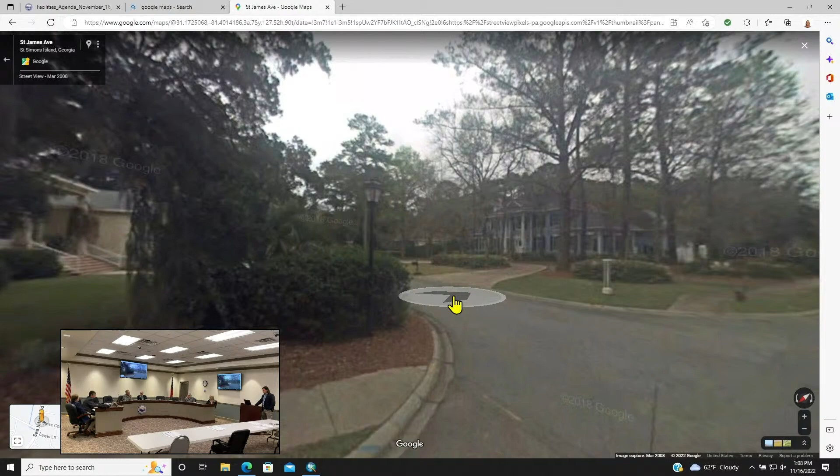Well, let me restate that and be sure we understand. It's caused by a lack of compaction at the time of construction. The completed pipe's fine, the pipe's in good shape, but the dirt around it has moved. Okay, so what we had is poor performance on the part of the contractor 6 years ago.

I think if you had one up earlier, it was a pretty good little snapshot of what had occurred.

Is there any striping required on this repave? The road's not currently striped. I didn't think it was, but I just wanted to check.

I have another question. It says here, does not include testing, permits, fees, and unsuitable soils. So those are costs that we have to bear in addition to this? Those are costs we'd have to bear. We do compaction testing in-house, our inspectors do that already, so we provide those services for our projects. And then for unsuitable soils, we do have a certain stockpile of available materials if we need to provide that as well.

Any permitting fees from the county on that? It's just a right-of-way permit. I believe, is there any charge for right-of-way permits? Not for us, not for us as a public utility.

And the last question is, how does the notification work for the people affected by the construction? Do we notify them, or does the contractor? We will notify them that the contract has been awarded. The HOA out there has been very concerned about this issue being corrected, so I'm sure when we give them the go-ahead, they will let everyone know about the situation.

Okay, I believe they're watching live. Yes. Okay, I understand that. And it has been a struggle to get quotes to pave this, right, so we've unfortunately had to put them off for several months. So now they see live their government in action.

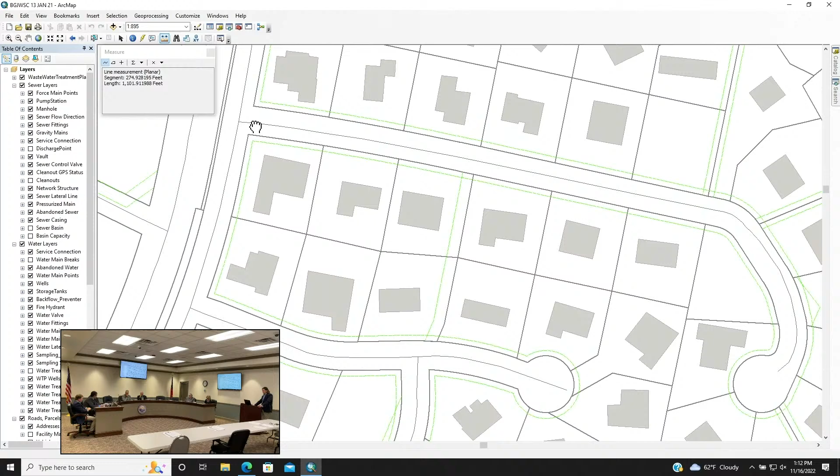I think we may want to have some understanding with our two local governments about what's practical in terms of a warranty that the utility provides to them on something like this.

When you have, over a period of time, I'm sure they've had some heavy equipment in and out of there, performing other maintenance or other construction. And those are things that we cannot control, but the county can in this particular neighborhood.

Certainly agree with that point, and it's been an ongoing discussion we've had with the city and the county, between both leadership and staff members, of exactly how long are we liable for these situations if they're 10 years old. And we get requested, honestly, to repair paving issues that were from road cuts made by United Water before the creation of joint water and sewer.

I think that deserves some work. And I wouldn't ask a question, I would say this is our warranty period.

That's all I have, Chairman. It is a tremendous cost to us to fix these old repairs. How much is a settlement?

Couple inches. Couple inches, yeah. It's enough, in certain areas, yeah. It's enough to alligator crack it. It's definitely settled.

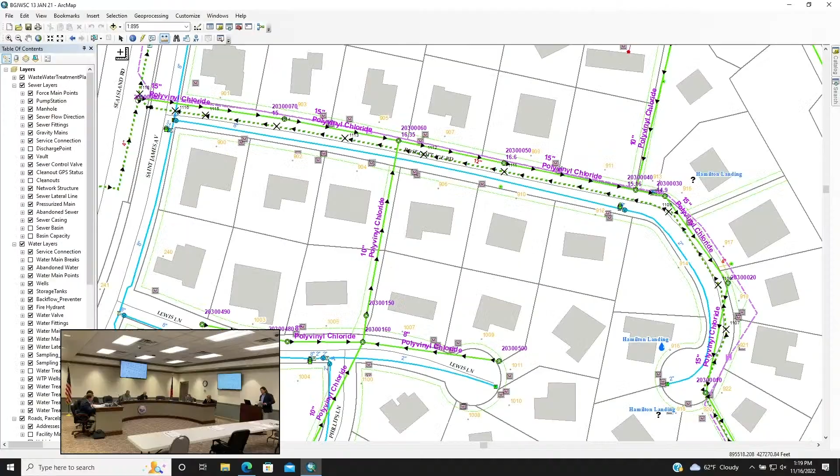Perry Place report. Okay, this item is an easement dedication and infrastructure dedication combined, as a result of private development for a residential development called Perry Place.

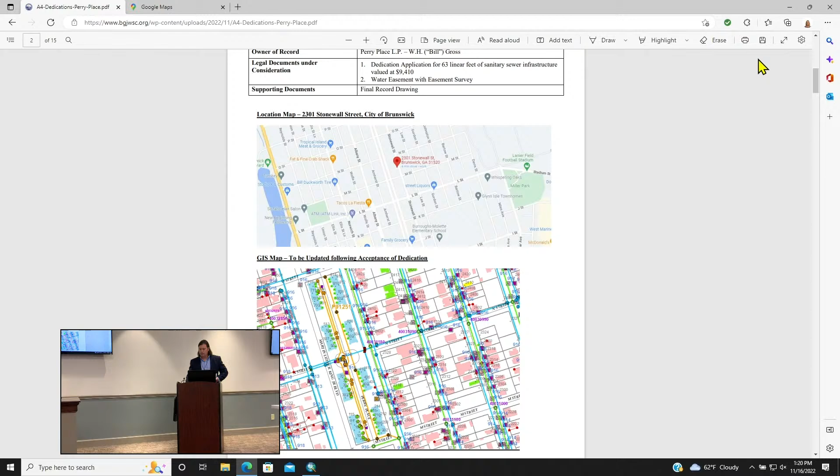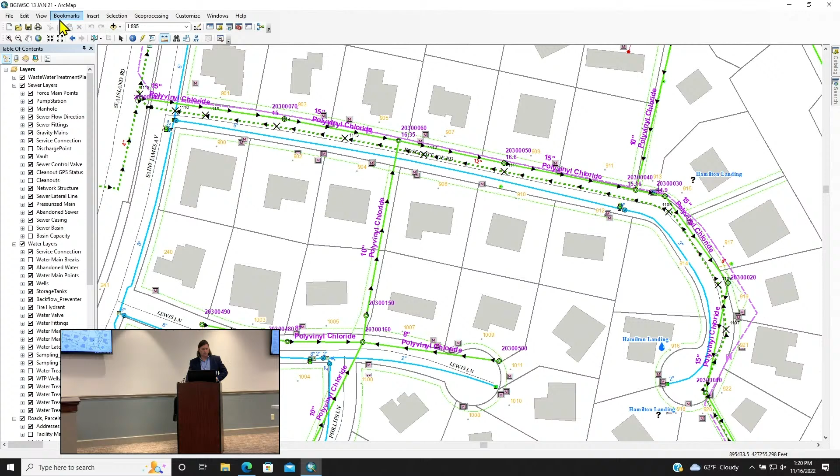And location of this, here. I will zoom into a spot to show you why we're obtaining an easement. It's off of Martin Luther King Boulevard and Stonewall. It's the site of the former, I think it was a bus yard there at one time, that some of the folks who've been around for a while may remember.

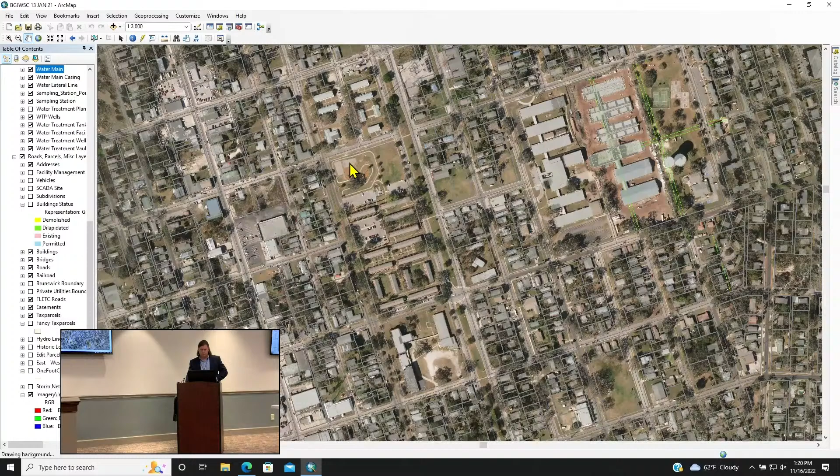It canceled, you've got to refresh. Yeah, it did. You made it mad. You know you don't click it more than once. Moving way too fast. All right, let's see. Well, now. You got to go south. I had my spot saved in here, then I took it off. Start over.

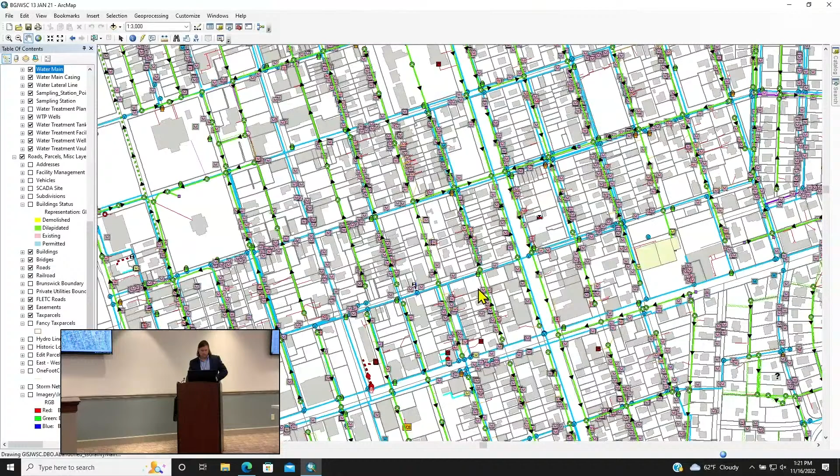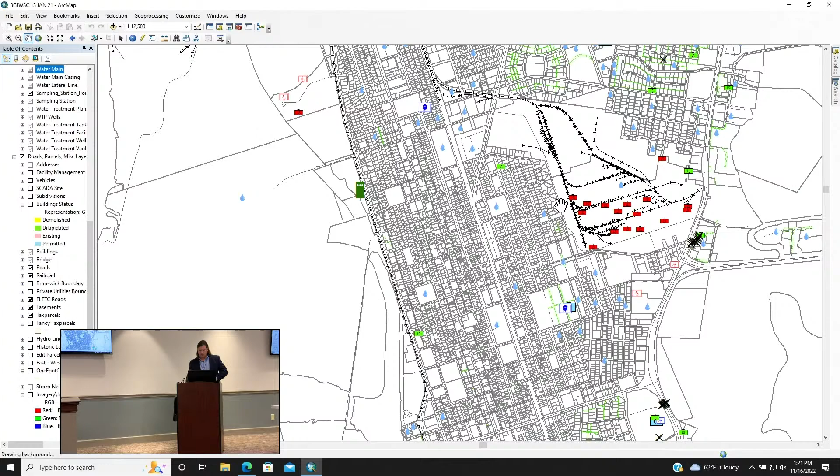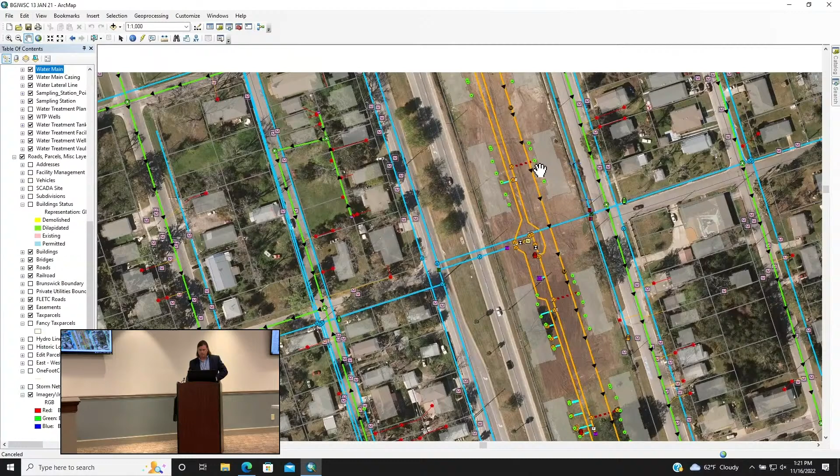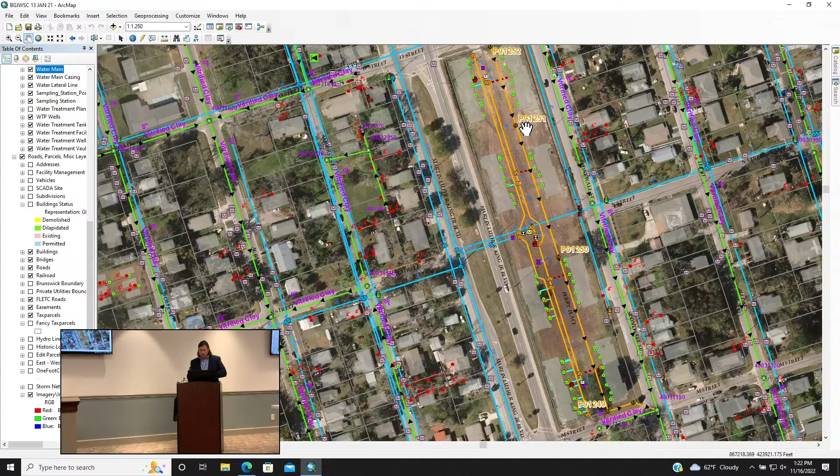It's the yellow, there we go. There it is, bear with me here. Kind of looks like in the old ortho image, at least it still looks like the bus yard was cleared. The ghost images are the new residential buildings that are in there. And the yellow lines are what's considered proposed, but if this passes and everything is accepted, those will turn into private or red infrastructure, still considered in construction phase.

The one portion I want to draw your attention to here, there's a pre-existing water line that runs through the center of the project, and it was probably when M Street maybe actually went straight through there. But here's an existing water line, that's what they actually tied into to serve their project. So as they develop this, we're obtaining an easement that's going to allow us future access to own or to maintain that line. And then there's also one little piece of sewer line associated with this as well.

The record drawings that are part of the exhibit attachments show that little guy also. Very last sheet, at least on mine, it's the very last sheet. Yeah, you can see a little 50 or so foot piece of sewer line in there. So that's the sum total.

The water line is not part of the dedication. Joint Water and Sewer Commission already owned that water line. It's part of the city's infrastructure. So the water line, we don't have an easement for that. This is to obtain an easement over the pre-existing water line that we already owned.

And then the sewer line is not in, but they're putting that in on this project? Yes, sir, they have already put that in and installed it, and the sewer line is down on this corner. Yeah, it's on the last sheet too. Yes, sir, very last sheet. The green, that's it right here. Now, we're talking about only accepting the sewer line and the existing water line?

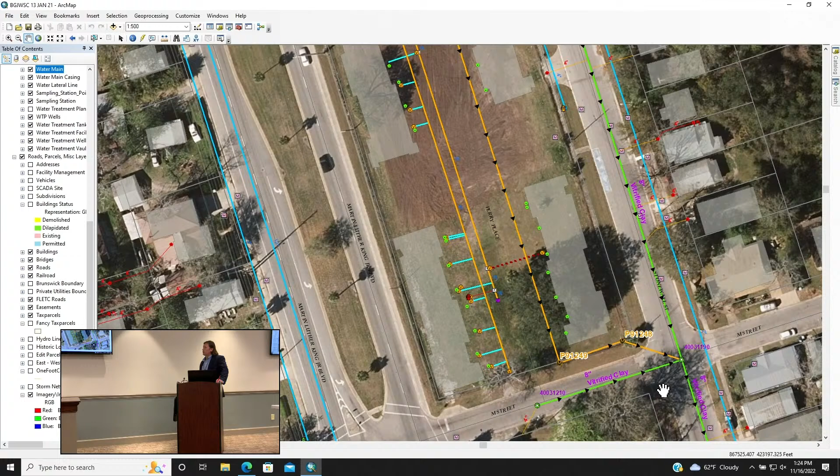The sewer line and then an easement over the existing water line. We already own the existing water line. Correct. Right, but we're not accepting any of the water and sewer within the private development. Everything, these are master metered. This is a master metered project, and so all the water lines internal are going to remain privately owned and operated. And the only piece of sewer that they are dedicating to us is in the public right of way, this piece here, to connect to our infrastructure.

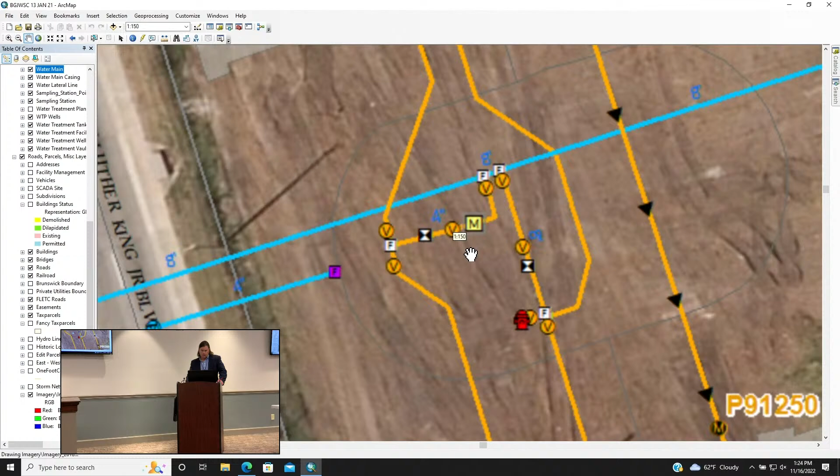And where's the master meter going to be? On that water line? That water line that crosses the property, that's the easement. It looks like we got several connections to that water line. I see a master meter, but I see several connections. Let's see.

Yeah, I may have to grab my glasses. Can you pull up the drawing we're looking at? Let me do that.

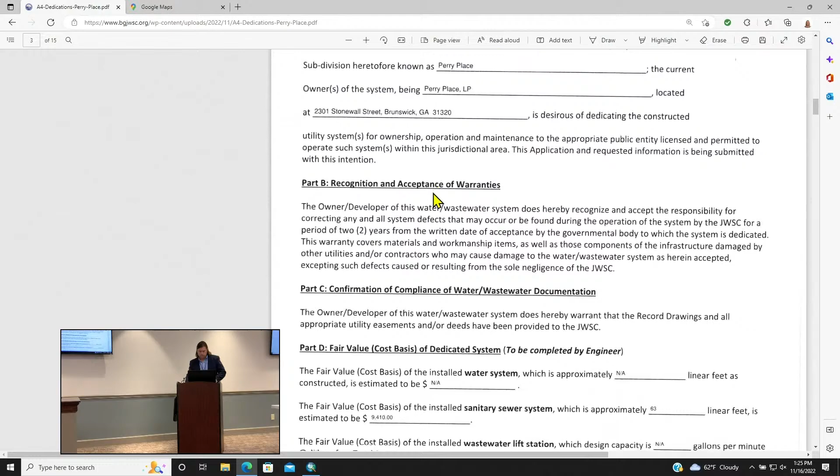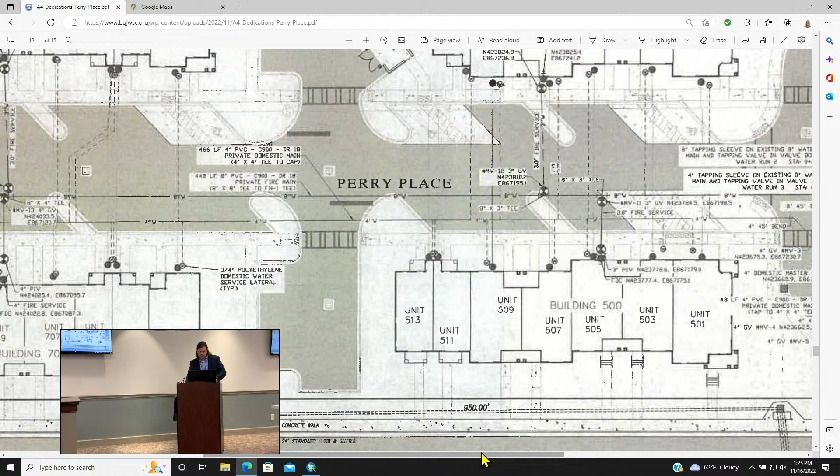So we presently don't have an easement over the water line, that's correct. Was this a bus yard before? Yeah, for the school system. Right, so we didn't really need the easement there particularly, they just moved the buses out of the way. Well, as Todd suggested, M Street probably went straight through at one time, until the property was closed, and then there's just an oversight to pass an easement along.

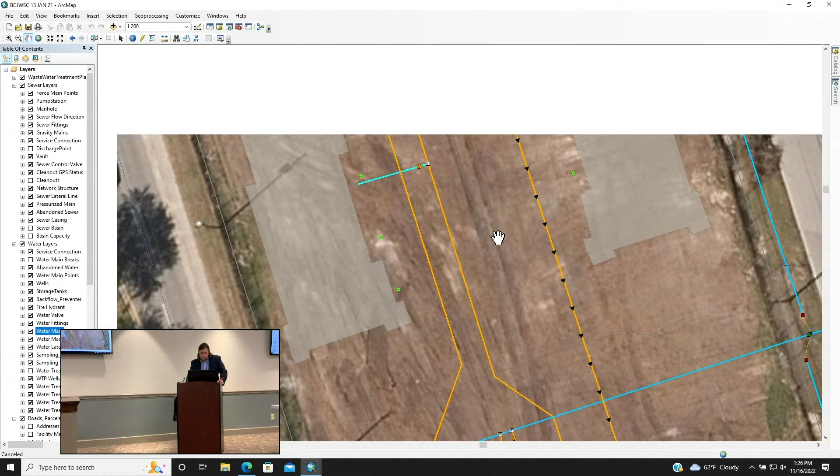Oh okay, it looks better than it did. Is the construction completed on this project? It is, I think it's fully occupied at the moment too. Are those rentals or homeowners? That I don't know, I don't know exactly.

Looks like there's one 4-inch meter coming off right there by the easement, and then there's a 2-inch irrigation meter over there with a 2-inch RPZ on it, for irrigation.

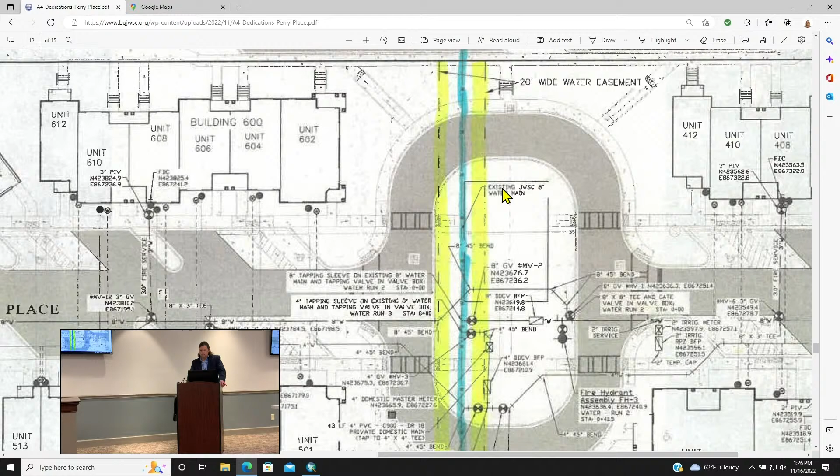Intent to remain private from the beginning, from the developer's perspective, correct? It was, yes. They own the fire hydrants and everything. As far as the fire department, is it gated? No, sir, it's not gated. I know the outside perimeter is gated, I don't know if it's gated to get in. I think it's gated - I know the perimeter, there's a fence along the street. Okay.

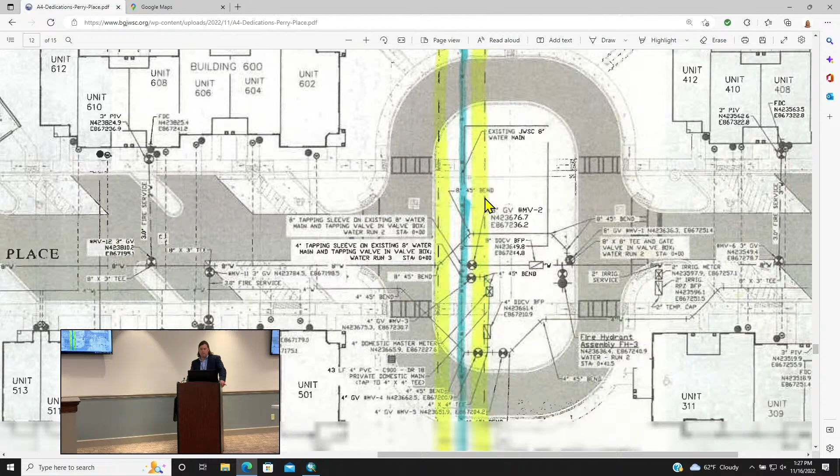So we just have one master meter? One master meter, yes sir. Well, and an irrigation meter. So we have two connections? And a fire line, so technically a third connection, but fire lines are handled separately, they pay a flat rate for that. So we got a third meter for fire line? There's no meter on the fire line. So we have three connections to the water line? Yeah, that's what I can't see.

It's what we call a double detector check. If there's a low flow, it's picked up. It's basically got a small meter off to the side, like a bypass, so if somebody ties in, it's got an irrigation detector check on the water line, fire line. On the fire line, correct, yes sir. And we've got an irrigation line that has an irrigation meter, and we've got a master meter on the water, so we'll be sending them two bills, irrigation and - I believe so, yes, two bills, same envelope. Possibly a third if there ever shows up a low flow on the detector.

Can I have a motion? I'll make the motion, I'll move the Facilities Committee forward this project with associated dedication, application, and easement to the full commission for approval and acceptance. I'll second the motion. Motion second, any questions? Hearing none, all in favor? Motion carries 3-0.

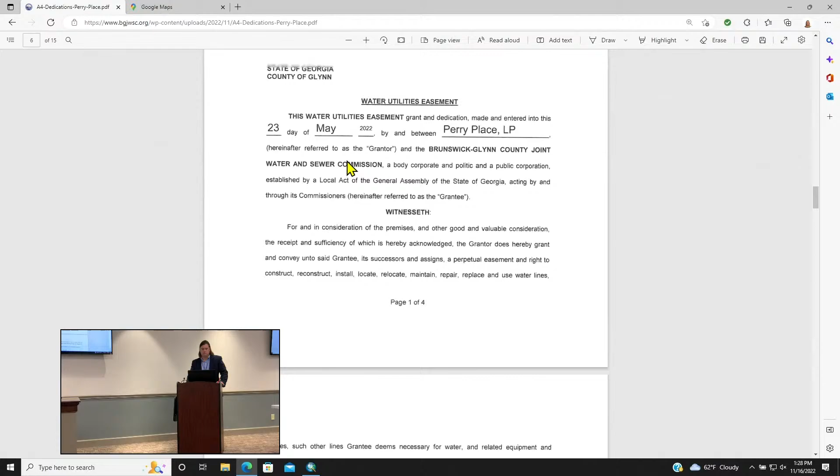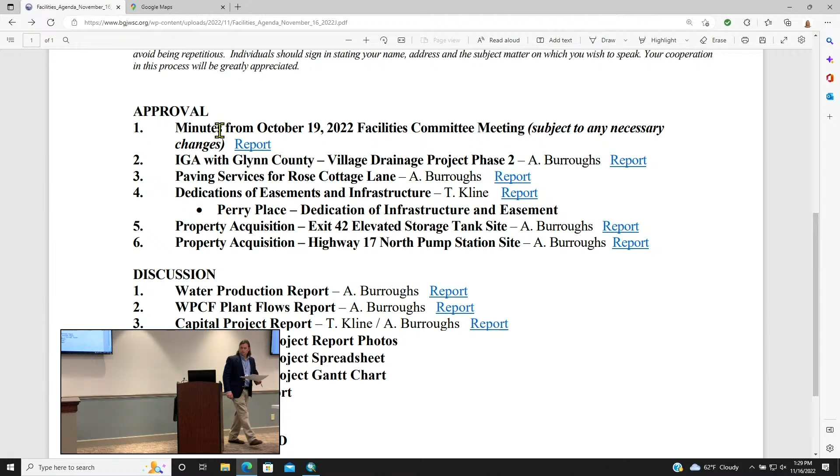Thank you. Next item is property acquisition, exit 42 elevated storage tank. Mr. Burroughs? Yes sir, out at exit 42 there are two large development tracts. The well-known one is Trade Winds, but also the Economic Development Authority in Glynn County owns the Gateway tract. What we are requesting is an agreement with the EDA for us to purchase a 150 feet by 150 feet approximate parcel in order to construct an elevated storage tank adjacent to the existing water main that crosses the Gateway property. As part of this agreement, there will be no exchange of funds.

The agreement the Development Authority has agreed to is they will be able to paint their logo on the tank, or at least some logo they want, at the time it's constructed. So they were okay with the ability to have their logo up there in exchange for the parcel. The goal here would be to build a 750,000 gallon elevated storage tank. That project is funded through the bond issuance, and this will be adjacent to the interstate right-of-way, coming into town past the bridge at exit 42, or the overpass at exit 42.

We don't have any other elevated storage tanks in the area? The closest elevated storage tank in the area is the one at the end of Kate Road, it's only a 300,000 gallon tank. And given that area's impending development, and also the chance for industrial development in that area, we feel it's important to put a larger tank up there for better control of pressure and fire flows.

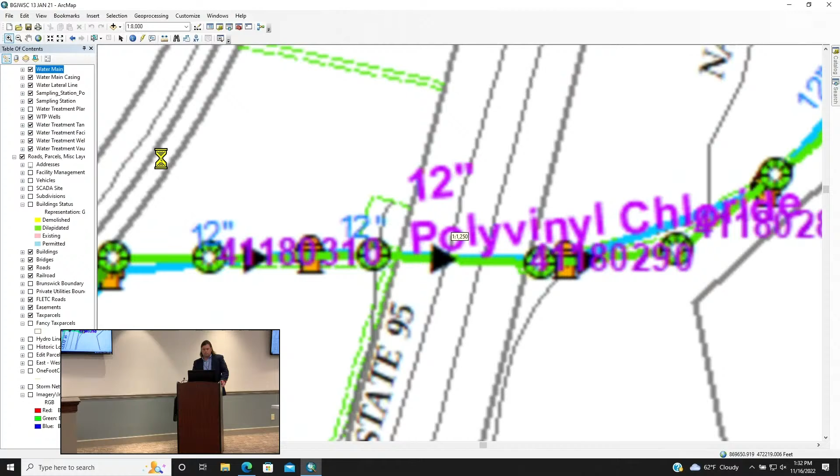Egress. Have we done any soil borings on this site yet? We have not. We've got the boundary survey, and then we're getting a topo survey completed, and then we'll move into engineering at that point, hopefully in-house engineering on this one.

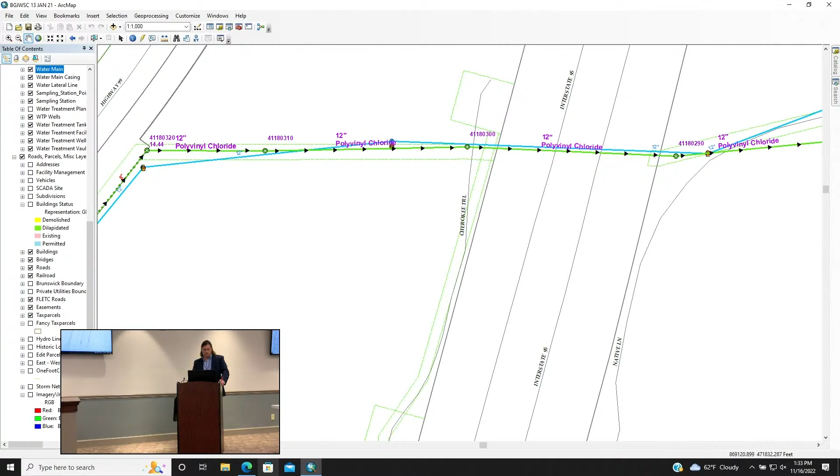So you can kind of see it there. We'll be just to the south side of the water line, because to the north side of the water line is where that billboard easement was at. So you can see it from the interstate, yeah.

What size is the water line and sewer line going through there? A 12-inch water line and a 24-inch sewer line, I believe.

The Canal Road well, we take off the Miocene wells up there, so once the Canal Road well is built, obviously we'll have to orchestrate which wells pump to which tank, and that'll help balance our system out better on well usage as well. I would suggest we get soil borings as soon as possible on it. Yes, sir.

Any other questions? No. Hearing none, all in favor? Motion carries 3-0.

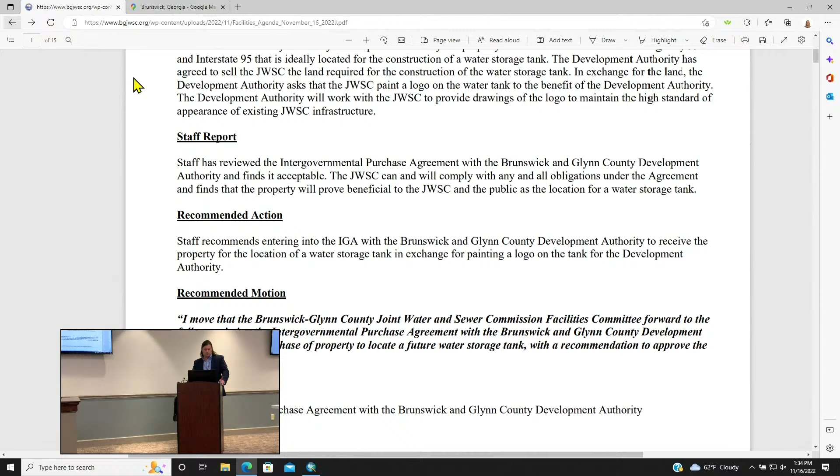Next item is the property acquisition, Highway 17 North Pump Station Site. Mr. Burroughs: Yes sir, there's an existing mobile home park out on Highway 17 called Golden Shores. Currently there's a need for us to install a larger pump station to serve more property in that area. Currently, the only thing served by a private pump station is the Golden Shores subdivision. There's another subdivision just to the south, and the ability to potentially long-term serve customers on the east side of Highway 17. So we've been working with the property owner to acquire our standard 50-foot by 50-foot parcel to install a new pump station at the location, and to get them off their existing pump station. If you recall, we installed a new force main in this area a year and a half ago, to get the force main out of the GDOT right-of-way for the 17 widening project.

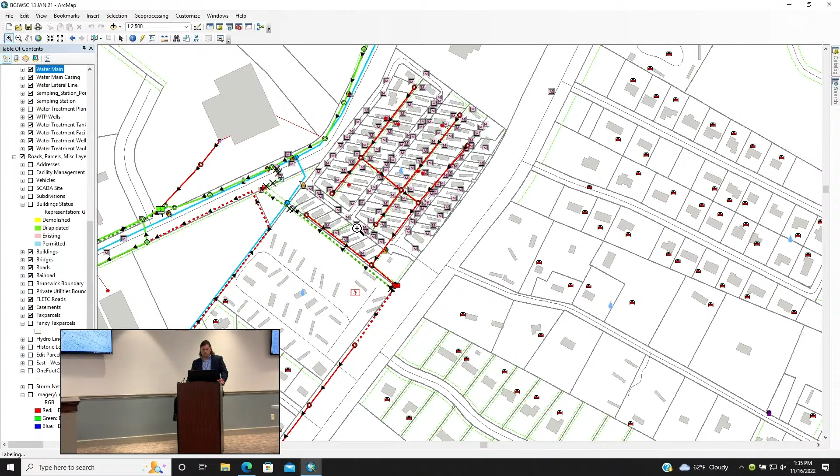I will note that the existing infrastructure on site is not up to code, but with the addition of a new station on the exchange parcel, the system will be deemed acceptable to the Joint Water and Sewer Commission. So the property owner has agreed to give us the property in exchange for us taking over his system as a result. Can I have a motion?

I'll make a motion that the Facilities Committee of the Brunswick-Glynn Joint Water and Sewer Commission forward to the full commission with recommendation for approval the purchase of the pump station parcel, in exchange for taking over possession and maintenance of the water and sewer infrastructure of Golden Shores. Second. Motion second. Are there any questions?

What kind of time frame are we talking about putting a pump station in there? Design plans are ready, we just gotta send them, once the parcel is straightened out, to EPD for review, and then we're putting them out for bid.

And we don't take over their existing structure until we have ours in place and running? We will take over their existing structure when the parcel is dedicated to us, when the paperwork's signed. So if anything goes wrong between the two times... we already know what's there, we are very aware of the condition of that current station.

And so to follow on with the timing of the operation of the new pump station, we're talking about at least by the end of first quarter next year. Yes, well potentially, possible if we put it out. EPD reviews taking usually 4 weeks or so to get anything back from them right now, maybe a little longer on some projects, so put it out for bid first quarter next year.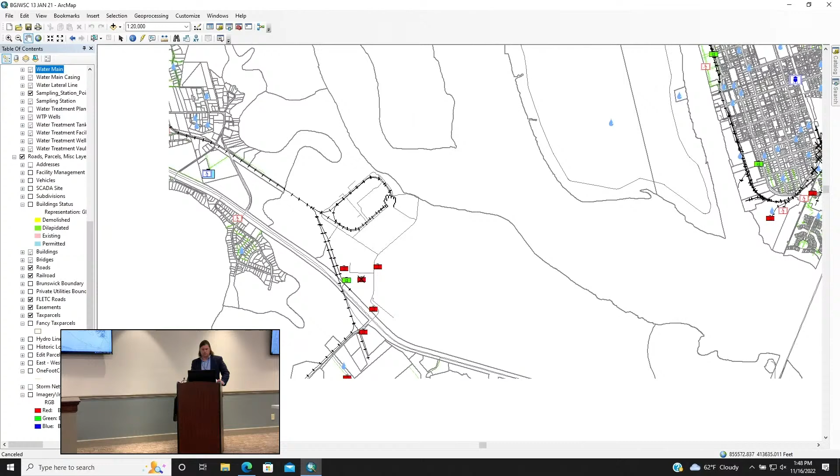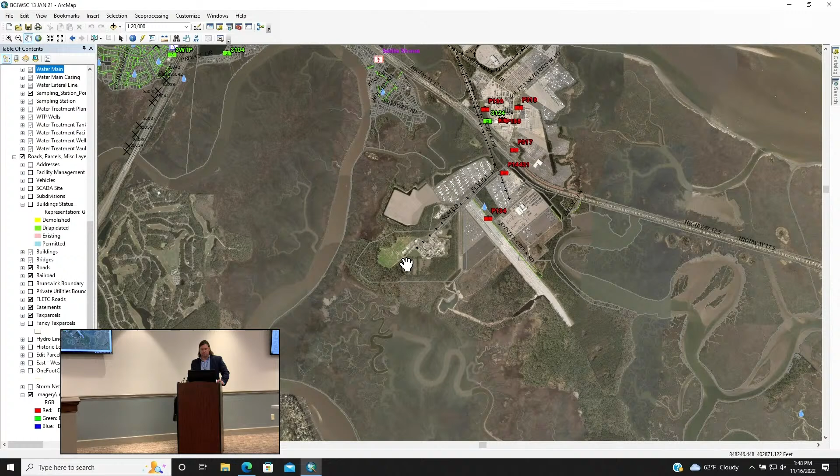So there, you see the port there. You can turn the aerials on. We can extend it to them if they want. We've brought that up, we have actually mentioned that. They have a nice water tower down there that they own. There's the port, the Cimarise facility is back in the back there, and our water system stops at Royal Oaks, at Fancy Bluff Creek. Zoom in.

This is our Fancy Bluff well here. So where the well site is right there at Royal Oaks, across the street, that's where the water system ends. And they produce their own water. They do, they have their own wells, their own elevated storage facility and everything on site. We take their sewer, we've asked if they'd like to be water customers, and so far we have not been successful. And the sewer is pumped back to Southport?

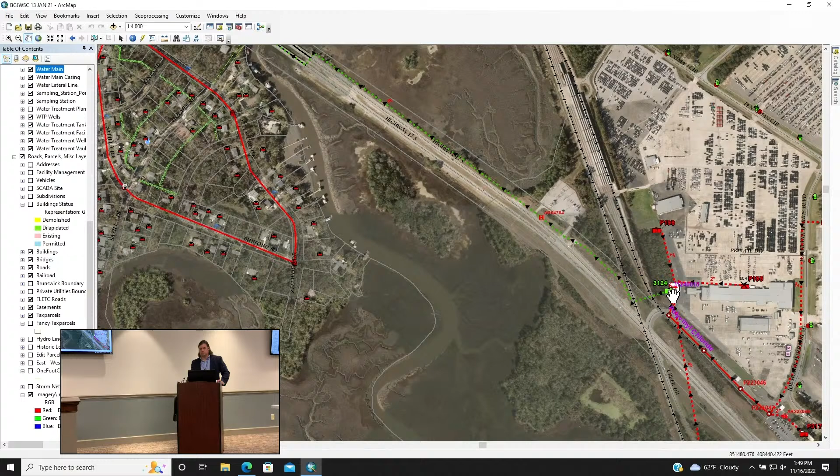Sewer's pumped to Southport, that's correct. Green dash line is the pump station leaving there. They have a sewer flow meter on that pump station that's billed to the Ports Authority. Is that their pump station? No, we own it, maintain it. What might make them change their mind, besides an exposure on national TV? Failing wells would probably be the only thing that's gonna change their mind.

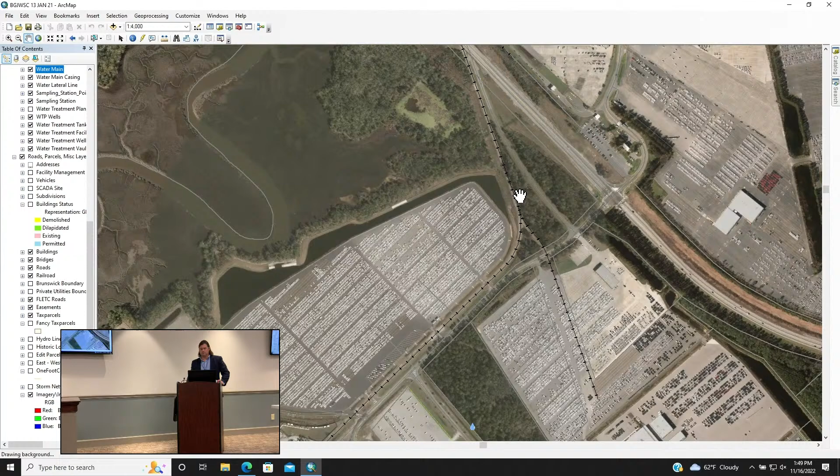And Cimarise is a separate entity. It is, from the Ports Authority, the very southern end of what Georgia Ports Authority has. So they're a self-contained unit, they have their own water system, totally isolated. The only thing they take commercial is power. So they have their own water system too? Yeah, so a lot of chatter, obviously, when major things like that happen in town. I don't know if they take natural gas, but anyway, they don't take any water or sewer. So, just kind of shows you the limits of some of our systems down there, and other reasons we're trying to expand the system. Now that plant was built, shucks, I think it was in the 70s.

That Fancy Bluff well was probably, when was that put in?

2004, well, somewhere around there. Yeah, is that the water system down there?

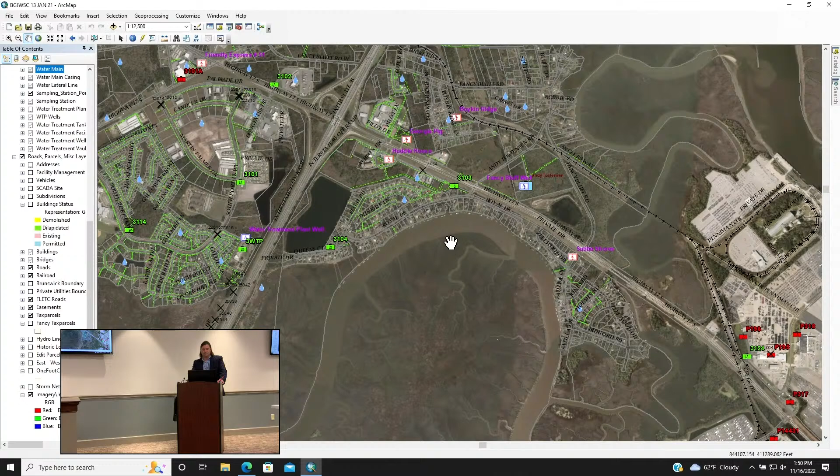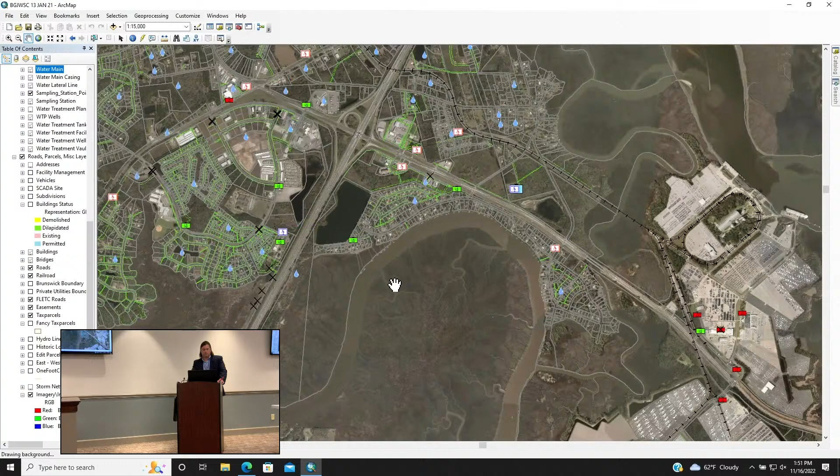We have an issue, not really an issue, just a paperwork thing with EPD. You have to do lead and copper sampling once every 3 years. You're required to have a certain number of properties sampled, but the house has to be built before 1988 and connected to the system. We don't have enough houses built before 1988 at exit 29 connected to our system to get all the samples we're supposed to get. I think there's only 3 built before 88 that are connected. We're supposed to have 10. So we have to tell them every year that we'll give them the 3 we've got, but we can't give them 10 samples. We give 100% of what we have.

Yes, so we certainly would be willing to provide water to them, absolutely, if requested.

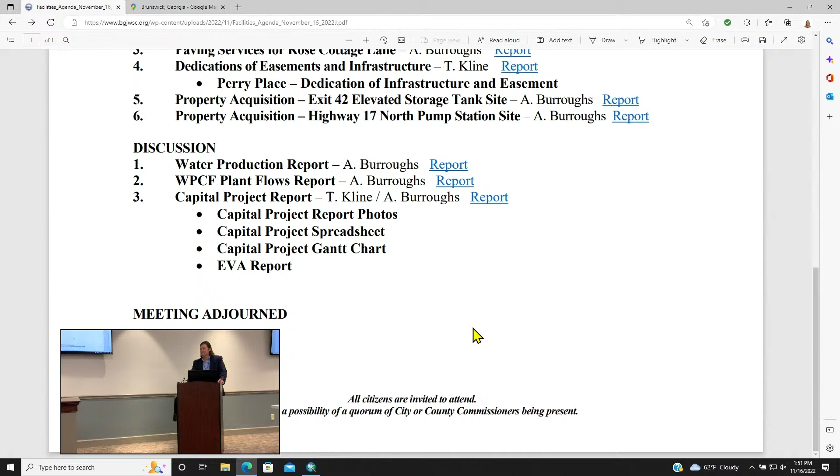Capital project report, Mr. Burroughs. All right, capital project report - our first project, which is good because it's starting with a higher number, meaning they're newer projects. Academy Creek facility there.

We've had some ongoing issues with the filters, and we were finally able to determine the cause. There was a slight piping error that wasn't allowing it to evacuate solids as efficiently as it should have, so they were building up in the tank. It increased the vacuum it was having to pull to try to remove the solids and ended up causing some damage. The supplier and contractor are covering all of the issues and taking care of it.

One of the sides is ready and back up to run, and the other one is being worked on as we speak. Hopefully those will be back up and running before the end of the month, operating the way they were intended to. One of those things - the supplier came down and told me he had bad news, and when he told me what it was, my response was, well, at least we have an answer. Answers are good news, so we moved through that pretty effectively.

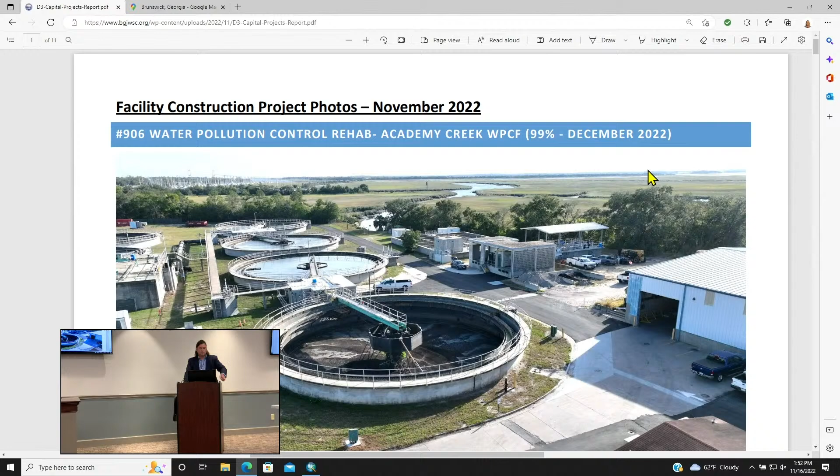So we're on the closed or idled clarifier there. What are we looking at to remove the grit from that part? We'll just fill it back up, and once it's filled and operating again, it pushes all that towards the center and is removed.

The bottom photo there is a shot of the headworks area, a new splitter box we have. You see the odor control tower - startup was officially today, so our operators were trained this morning on the new odor control equipment. It has been very effective, running with all the panels installed for approximately 2 or 3 weeks now. That doesn't mean you'll never drive by and catch an odor periodically, but it's been drastically reduced in my trips through there for the past 3 weeks.

That smaller structure beside the large tower - if you can show that carbon filter right there - will be filled with activated carbon to remove anything passing through the biofilter as well. So that one's moving along well.

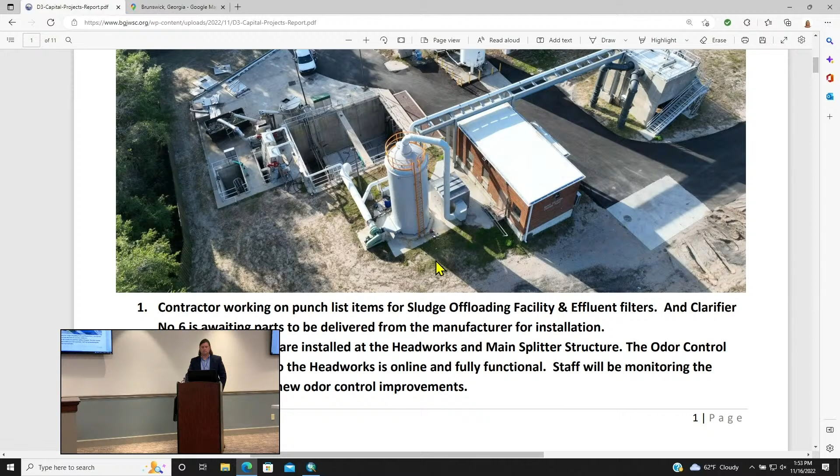Still got some punch list items we're trying to knock out. The overwhelming majority are related to electronics issues. We're having a lot of issues with sensors and HMIs and things like that came standard with the equipment, and we're having to replace them, but the lead times on some of those items has been pretty lengthy.

I have a question here: it says staff will be monitoring the effectiveness of the new odor control improvements. Is that a formalized process?

It's a formalized process where I walked around and talked to people I know who come down 341 every morning and go home on the way to work, and asked them - particularly those not as desensitized to it as some of us who have spent considerable time at a wastewater plant.

In fact, Miss Janice gives me the daily report of whether she smelled anything. Well, at least we have an A-team member here doing it for us. That's great.

Just a thought, perhaps this is in the program - to do some monitoring at the same locations we did, I think it was 2 or 3 years ago, so we have additional data. We have a baseline, and now we have new data since we've operationalized the odor control system. I think that would be beneficial to share.

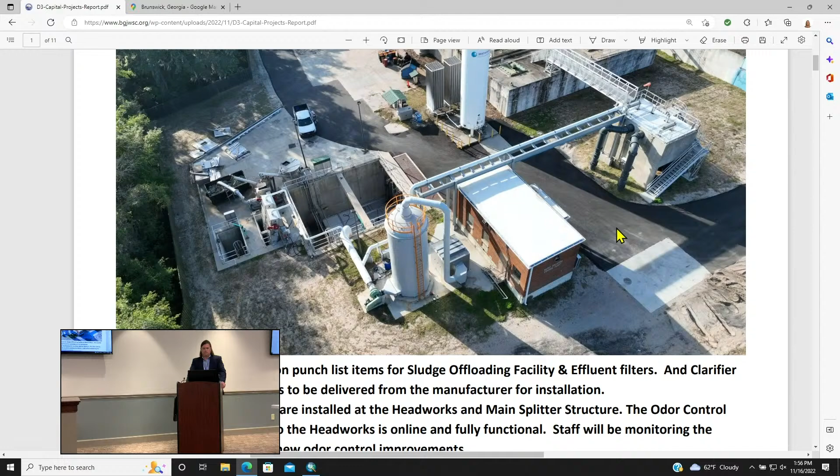These two photographs also show the new paving that we just had done. It looks nice. I have not gotten any more nails in my tires since we paved that. Did have to buy new tires finally, but picked up a few flats from driving around there for the last year and a half.

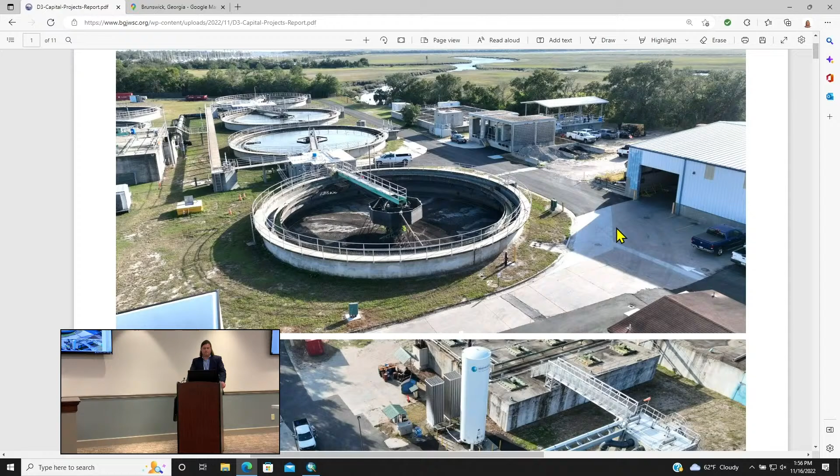So we're down pretty much to the punch item list - punch list items on all that. For odor control, there's only one more thing that's got to be started up, which is the sludge offloading facility, which we're working with the engineer to correct some issues with so we can start that up. And then everything else is just punch list items.

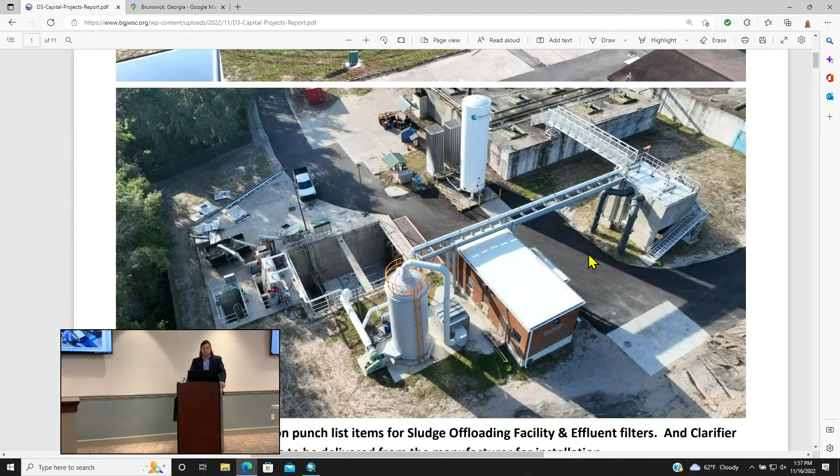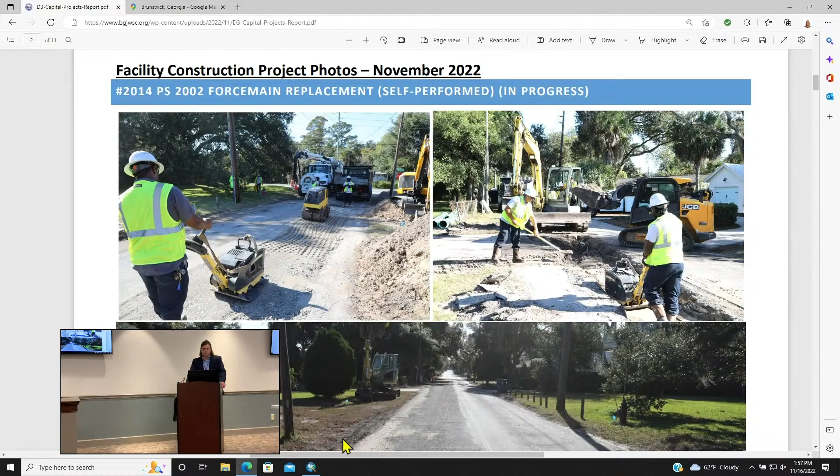All right, Pump Station 2002 Force Main, that's the Arnold Road project. We started out a little bit snake bit the first day. We got out there after testing equipment the previous Thursday and Friday. The first day when we got out there, the equipment didn't function, so we got essentially nothing accomplished from a new pipe perspective the first day. The second day, we finally started putting buckets in the ground and found a water main that we didn't know existed. So the first couple of days were pretty much a wash from a productivity standpoint.

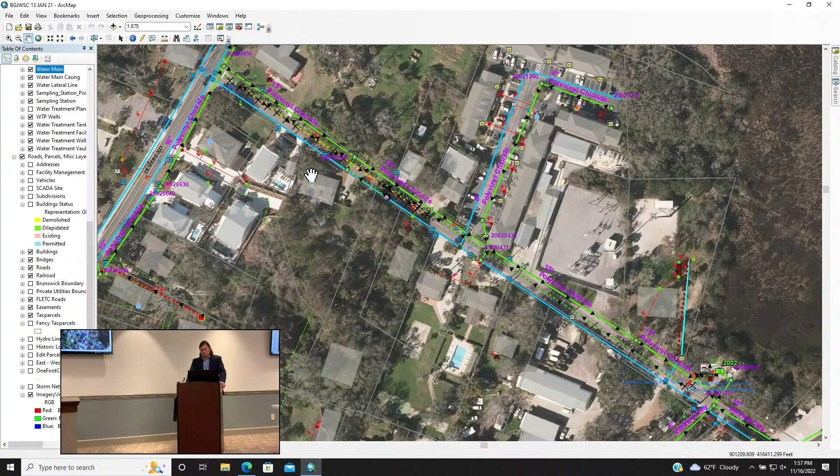We did not hit a gas main, but we found a gas main that appeared to be leaking, so we had to call Atlanta Gas. They came in, and of course you have to evacuate the area while they do their work. So the first two weeks, despite hoping it would be completed in two weeks, we were able to get 300 of the 1,000 feet installed. But the first two days of this week, we've got an additional 200 feet installed, so we're back to making progress effectively there. The hope is certainly - we were planning to be paving this week - but the hope is certainly to be completed before Thanksgiving and paved soon thereafter. So crews have been working hard, just one of those projects that couldn't get out of the gates very well.

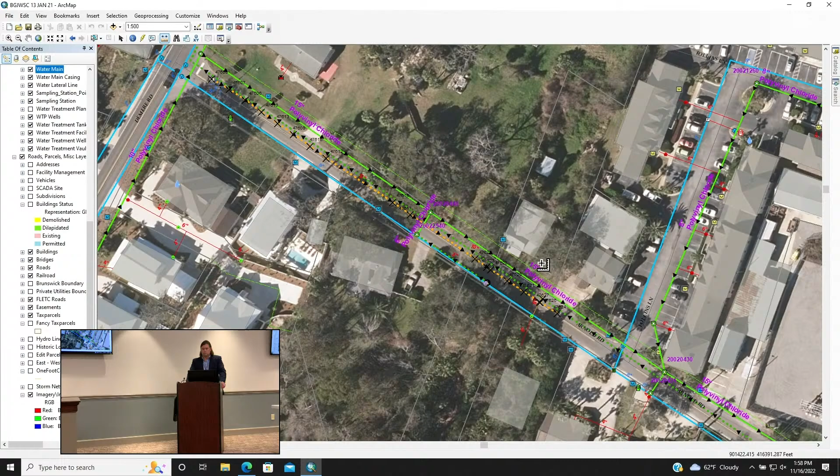How does the delay fit with our paving contractor? We've made them aware, and they seem to be able to accommodate so far. Good. So the goal is to pave beginning the Monday after Thanksgiving, the 28th, I believe that is.

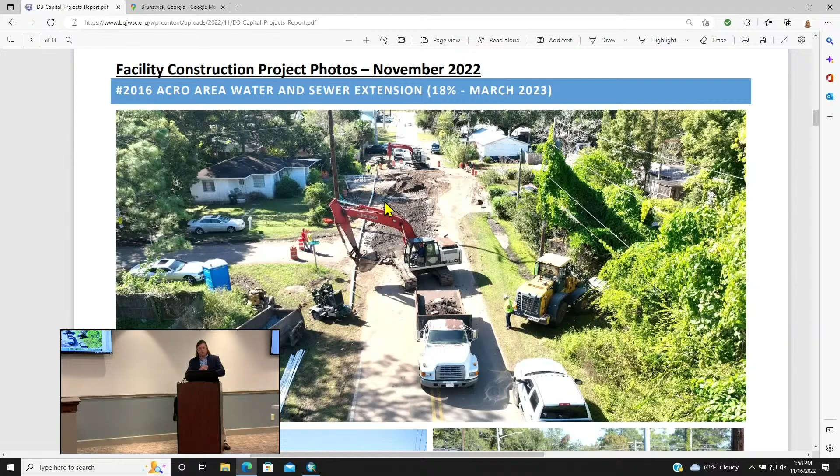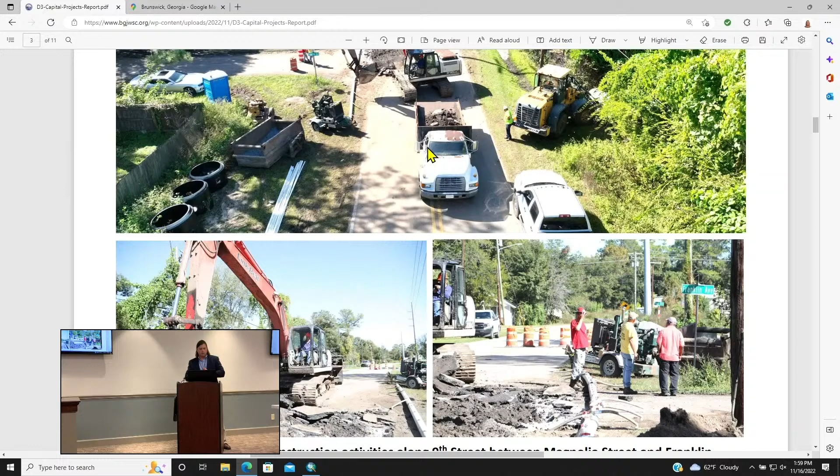Okay, next project is 2016 Acro Area Water and Sewer Extensions. That project is moving along still. If you get a chance to drive through the neighborhood there, you'll see a lot of activity. Most of the water main is essentially complete out there, and they are currently working on the sewer installation down 9th. Probably next meeting will bring to you an idea that came about between the engineer of record and the contractor on a reroute of what was previously planned sewer, so I look forward to bringing that before you for consideration. A lot of activity going on down there.

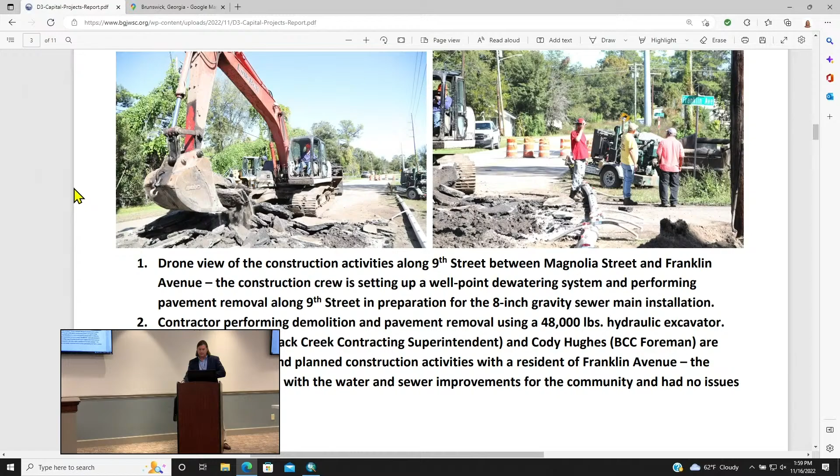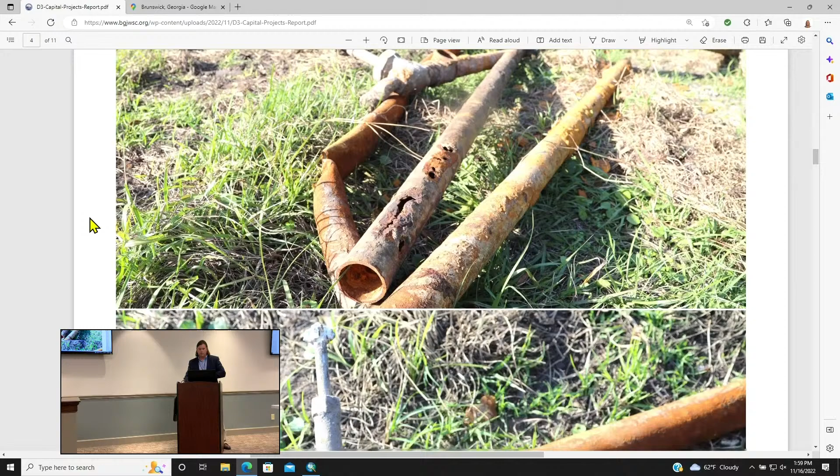Next project is galvanized replacements. Always get some good pictures from that project. In-house forces are pulling out the old and replacing it with new. We're somewhat at a standstill on the galvanized project because we're waiting on tubing to show up to actually start replacing some of the galvanized.

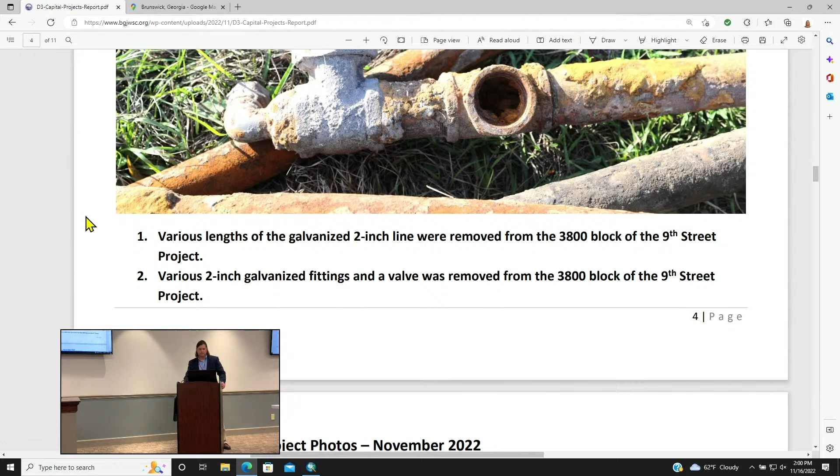We've also installed some new poly lines in St. Clair subdivision and up in the Reynoso, Menendez area. But we're having to wait for corp stops to show up. We keep a handful of corp stops on hand for building as it continues so we don't hold up any of the builders, and we're waiting on a shipment of corp stops so we can start installing the new services there.

Before we leave that, Andrew and Todd were at a conference that just finished today, and they brought us up to date about lead and copper service lines. I think within 3 years we're supposed to finish a survey of where our lead service lines are in people's houses. In the newer subdivisions it's not a problem, but in the older subdivisions, which we have a lot of, it is. Andrew, you want to address that and tell us what we might be doing?

Using the Glynn County tax records, they have information on when homes were constructed. We're going to filter out anything built after 1988 because it shouldn't have a lead service line if it was built after 1988. Anything before then, we're going to have to confirm.

We're actually demoing a piece of equipment in a couple of weeks that will be able to suggest where there might be lead service lines. It sends some type of current into the line, not electric - I don't know exactly what it is - and with the resistivity it tells us the different types of materials. So we can do it that way instead of having to dig up all these services. You just take it loose at the meter, run the equipment, and then it tells you.

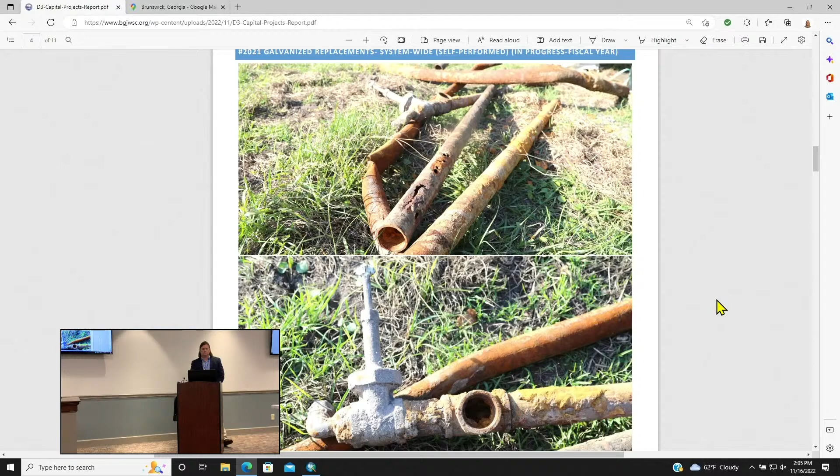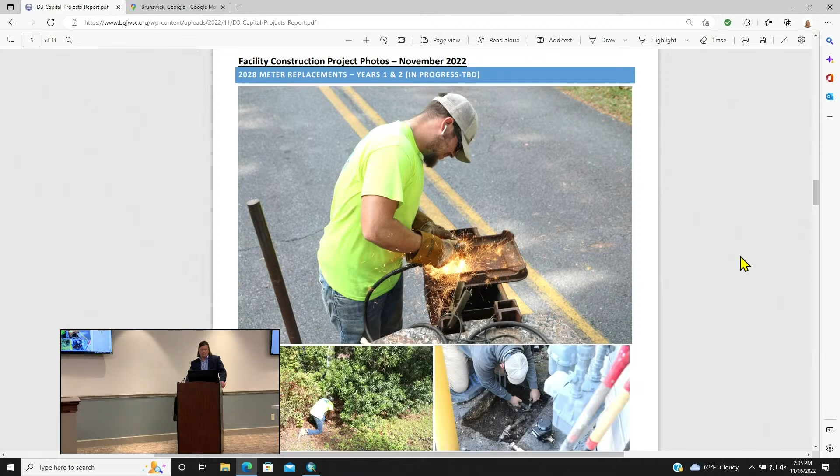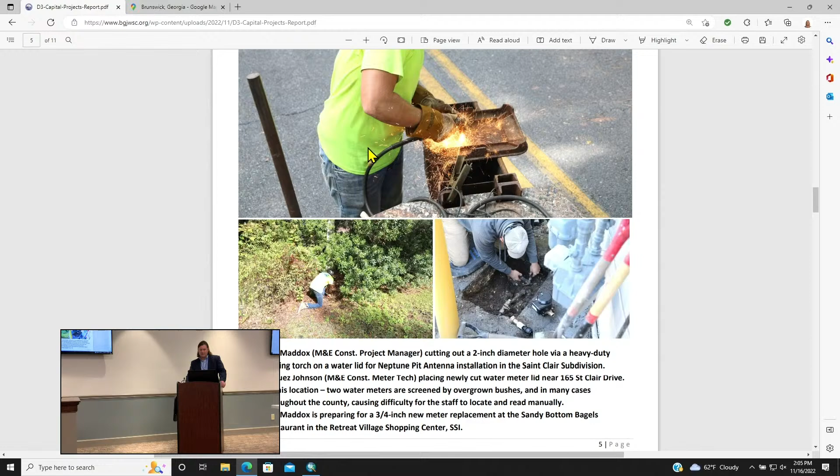Speaking of meter replacements, so we get photos here. Looks like M&E's busy at it still. Mr. Eric Maddox was caught in action. A lot of this is manual work. I think he's welding, doing repairs, using a plasma cutter, cutting a hole for the antenna. So, a lot of hands-on, heavy effort going in there.

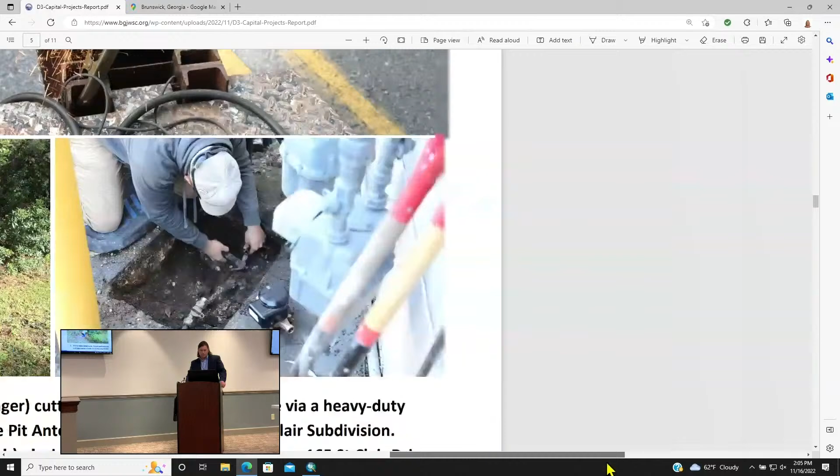That's kind of what everybody was just talking about, about sometimes there's potential to identify what's in the ground while you've got it open, but maybe they can be sweet-talked still, huh?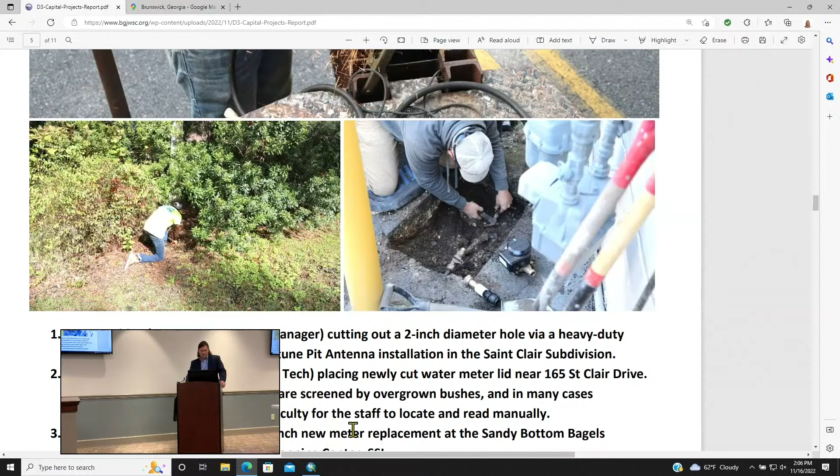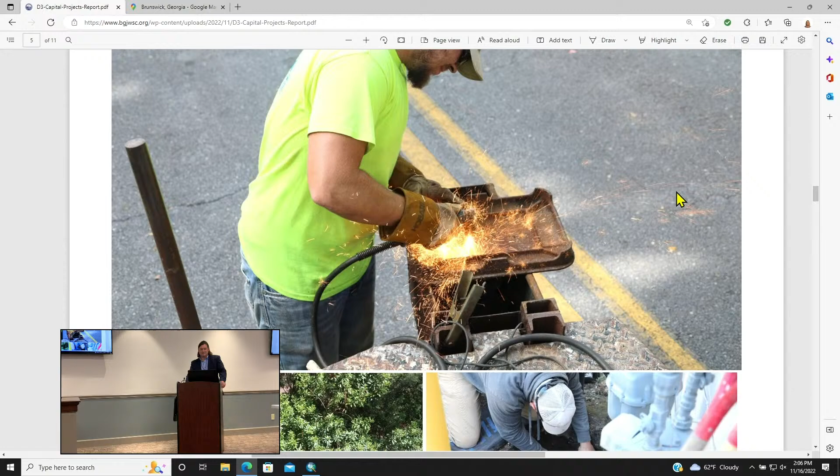Have we found any places that were not metered? Any place, we have found places that had bypasses installed around the meter while we're doing this. But have we found any place that was not metered? We haven't sent them to places we don't know about. We've sent them to the meters we're aware of.

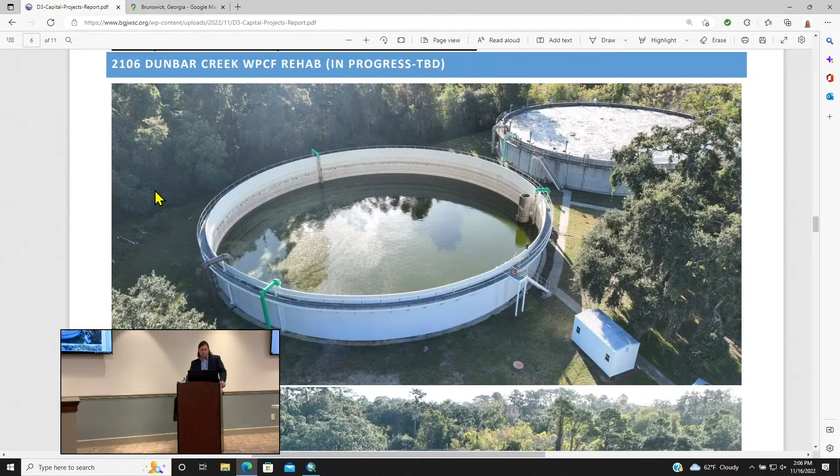All right, Dunbar Creek? Dunbar Creek, we're in a bit of a holding pattern, waiting on materials to show up on that facility. I speak with the contractor every week or so, and it's the same story. He's pushing, we're pushing, trying to get things to show up right now. It's been a bit of a challenge.

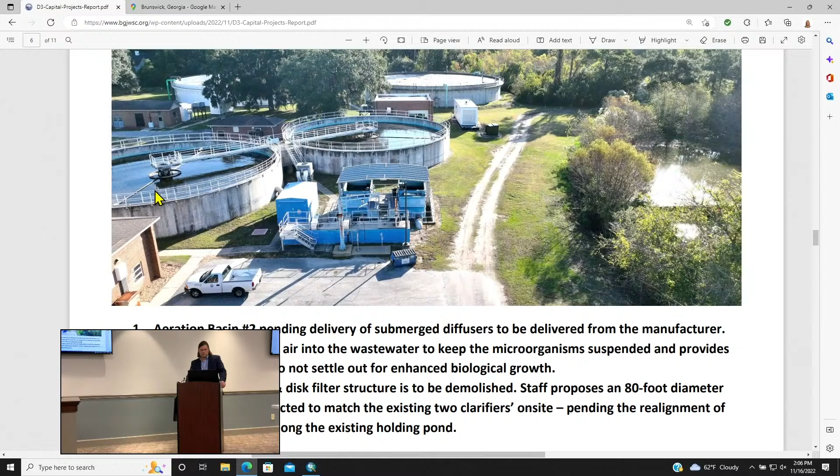Tank is ready to go. We're waiting before we try to fill that thing back up and put the old diffusers in. We were hoping to get the new diffusers in, but we're still being told January on delivery for the new diffusers. We've asked if they're willing to send us half so we can do one tank instead of having both at one time, and the manufacturer has not been able to accommodate that request at this time.

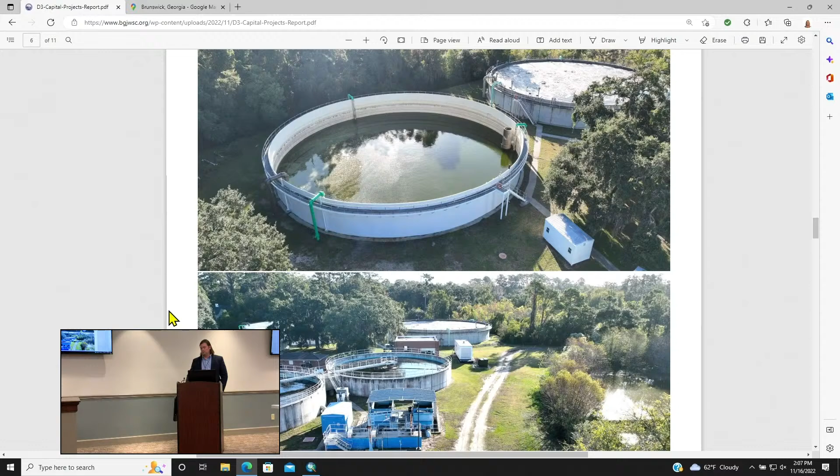So we are asking for some quotes and additional engineering-type quotes to see what it would take to potentially fill in a portion of the pond there on site and bump the roadway out a little bit to allow for future installation of a full 80-foot diameter clarifier right there. So we would have to shift out into the lake a little bit. We expect that's going to be pretty expensive, but we'd like to know what that actual cost would be, so that's something we can consider the cost benefit of.

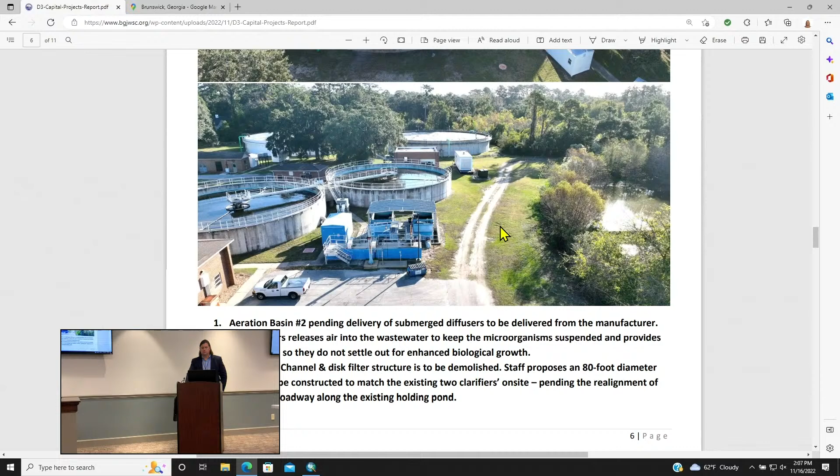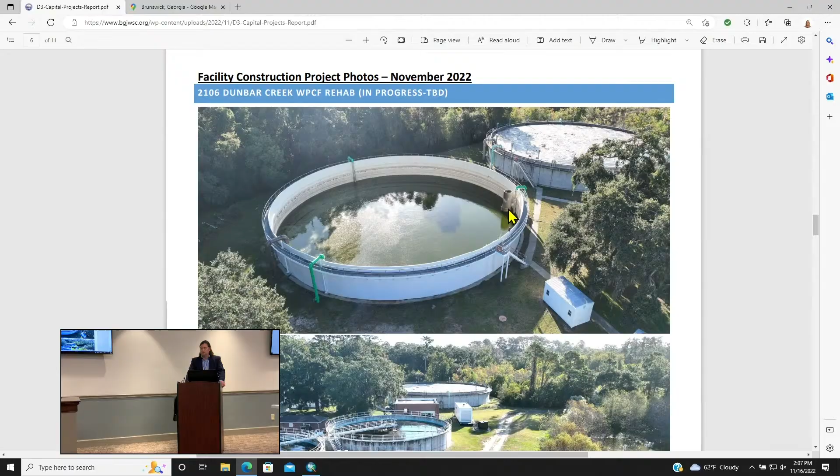The top picture shows the tank. There's a steel tank that's been repainted. One comment, Andrew, the outlet structure there on the right-hand side, we need to ask the engineer to design something that covers that with some kind of grate or something, because when that's full, if somebody ever falls in that basin, they're going to get sucked into that line. That won't be very pretty. So if we can ask them to do that, I will, and have a change order on the contract with that.

Okay, moving along, now in action is our Glynn Place Mall to Oglethorpe site as well, elevated storage tanks rehab project. We just had the kickoff meeting with the contractor, I believe earlier this week, and we're mentioning notice to proceed 1st of December sometime. Yeah, we're looking around the 1st of December for NTP.

And that's going to time in right. They've got a big job, I think in Arkansas going on right now. They're going to bring over the same crew that did our last two rehabs. They did a really nice job, so expecting the same on this project.

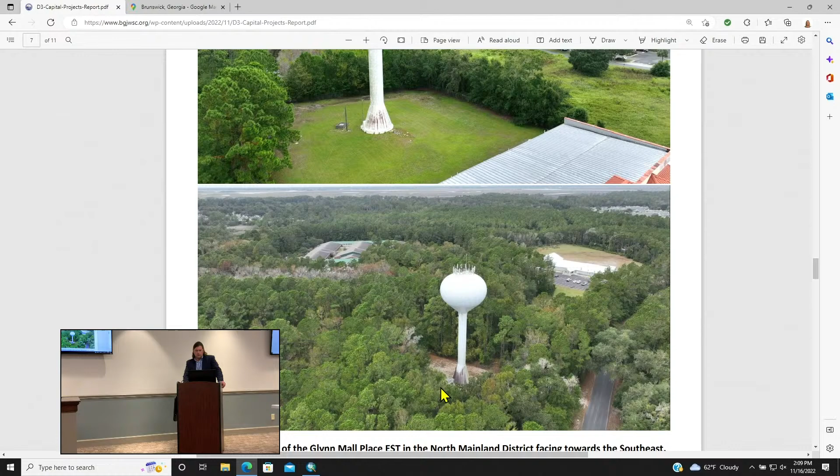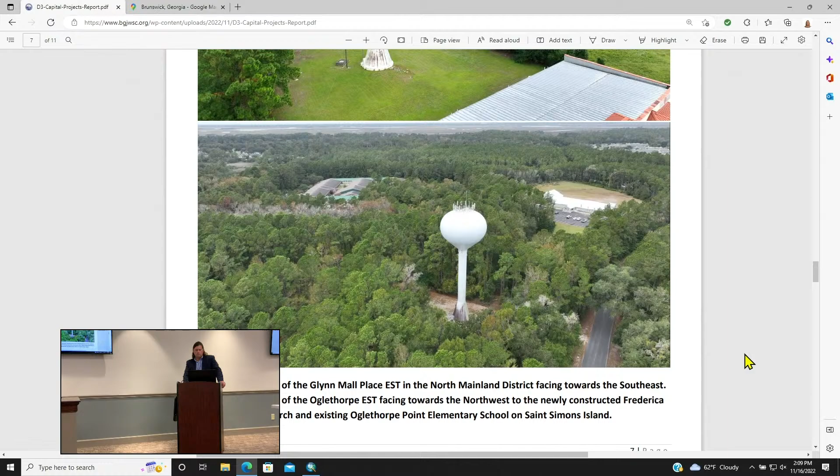I wonder if it's more expensive to paint this kind of tank than the other type of tank. I don't know if it's more expensive because of market conditions or because of the type of tank, but it's definitely more expensive for this contract than it was the last one. We'll try to get some information on that, pedestal versus the tank itself. The new tank we're constructing is probably going to be the composite tank with the concrete base all the way up, and you only have to paint the very top of it.

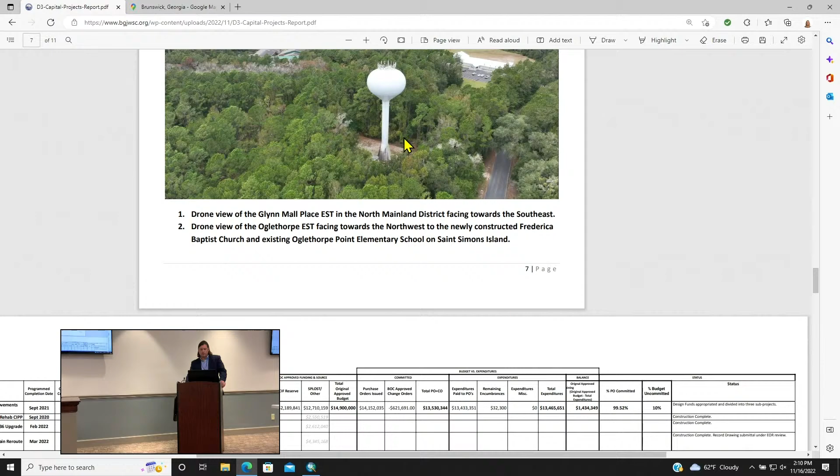All right, now here's the spreadsheet, and what I'll touch on is a few things. Our projects in motion report, the picture report of things under construction - you've seen it dwindle down in sheet count, but right on its heels are some new projects coming out pretty quickly. Touch on a few of those.

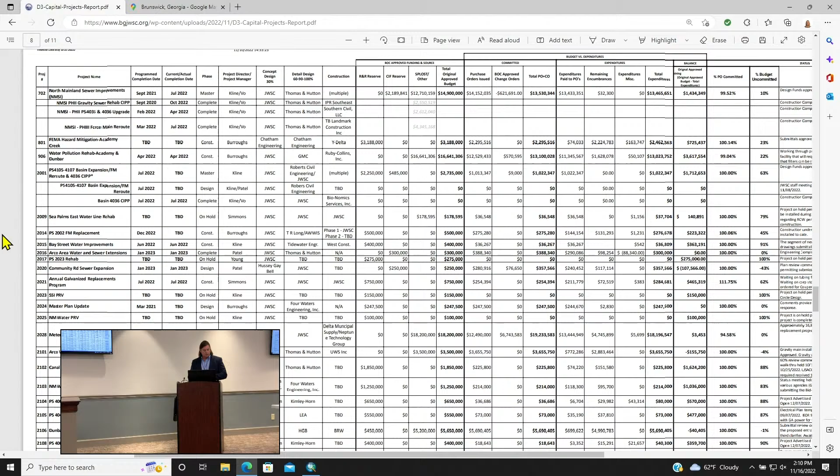Projects wrapping up or closely wrapping up in engineering design: Community Road sewer expansion, that's one wrapping up pretty quickly - 4105, 107 in-house, we're splitting out the force main and shooting that off to EPD in the next couple weeks so we can bid out the force main itself.

Canal Road Water Production Facility, we should be getting 90% drawings on it in the next couple of weeks from our engineer of record, Thomas and Hutton. North Mainland Water Loops, wrapping up all the final permitting issues there - that's another one going out for bid. We're hoping if not December, first quarter.

And then the pump station rehabs, which is 4002, 4001, and 3101 - Friday actually we've got our bid meeting with our engineer of record on that. Hopefully got a big list of contractors signed up to attend. That's another one that's going to kick off first of the year or so.

Let's see here - 2056, we're going through in-house formulating the design RFP for that one, looking for some help on the force main. It's going to require some surveying and a little bit of design on the force main. And then 2033-34, we're doing that in-house, developing scope of work to put that straight out for construction - those are upgrades for those two pump stations.

Brunswick Villa area sewer extensions - got our engineer of record engaged in that one and kicked off, ready to go. And 3114, that's a reroute down on the south end. We're going to do that one in-house, procuring surveying services right now for that. So there's a lot of stuff behind the scenes coming quickly on the heels where you'll see that picture report start picking up again.

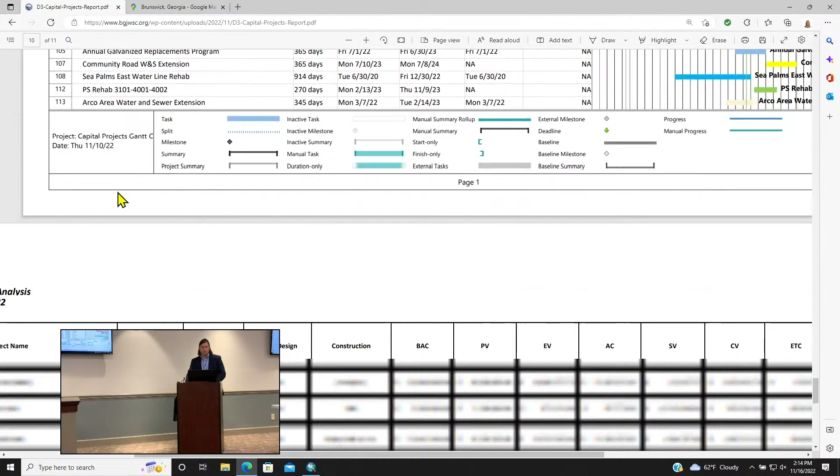Is that it? The facilities improvement project - I don't think they started this week because the weather messed them up. They were supposed to start painting the building this week. I don't believe they've actually started though. I wouldn't think so. So if they don't start this week, I don't expect them to start next week, so it'll probably be the 28th before they start the painting project.

Anything else? That's all I have, sir.